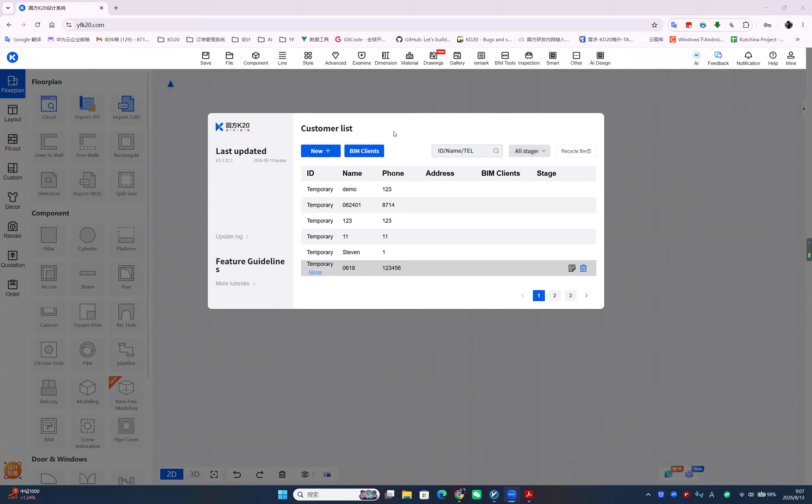Hello, quick high-level question. How do we edit the wall height if the project requires a higher ceiling, like a 4 meter ceiling? The wall is already preset, so how do you edit the preset wall height, the ceiling height?

Or the ceiling design height? Because when you place the wall, it automatically generates the wall, floor, and ceiling, correct? Okay, I know what you mean. First, the room height. This is the room, right? Let's click this one, and we can see here, this is the room height.

So here, this is the room parameter. The default is 2,800. So this is the room ceiling height. The ceiling height is going to be deducted from the room height. That's the reference, like negative 350, like yesterday, remember?

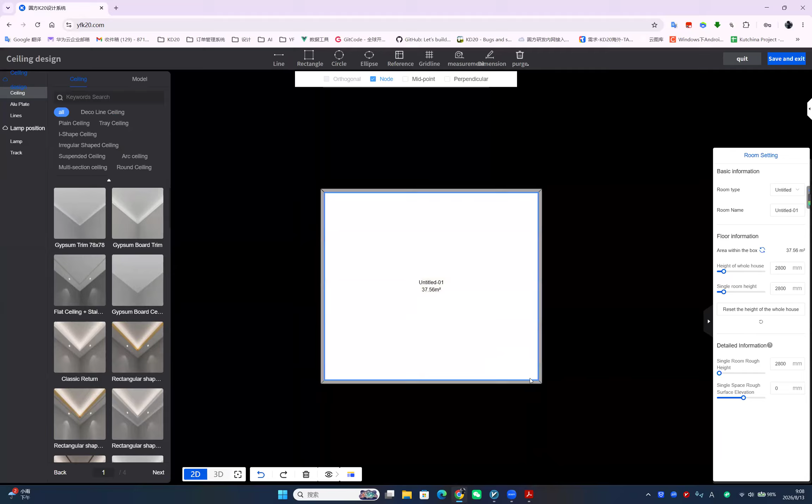Oh okay, the ceiling. I use this ceiling, like this ceiling. The ceiling height means this one, the sink. The sink here is referencing from the top, down to here. Basically the base room height, the base ceiling height, the one we established in the room, deduct the ceiling. That's the actual, so at least we can assess, correct?

Pardon, can you repeat again? Okay sorry, so I'm just assessing.

So the main ceiling is, let's say if you have a cove light, right? You have a ceiling, you have a double ceiling. The main ceiling that we're going to deduct from the ceiling model is the room ceiling, the one from the room parameter I'm asking earlier. Then if you're going to model the separate drop ceiling, that is referencing the main ceiling we discussed earlier. That's why it's a drop from negative, sinking 300, meaning it's going to sink from the original overall height of the room, correct? Correct, okay.

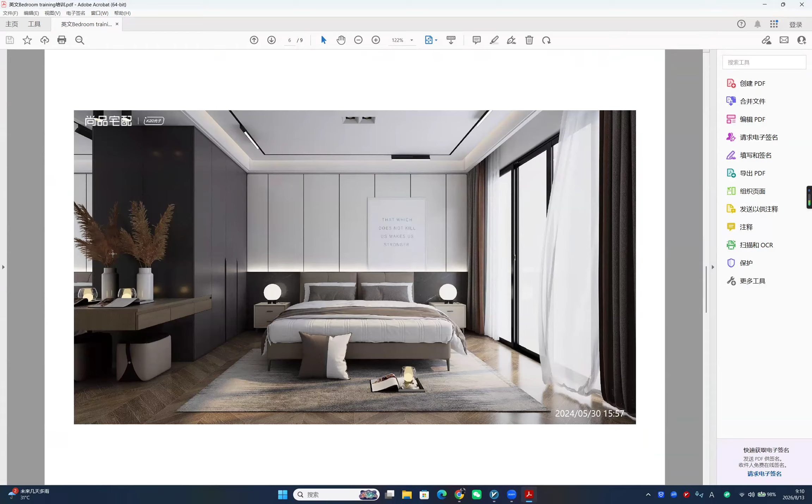Okay, like here, like this. Today we will design the bedroom, like this one. Okay, firstly, we can see this is the simple bedroom, firstly we draw the floor plan first.

Okay, and then we also click this one, the free walls. Free walls, and here we use the inner option. Firstly, we left click and draw and enter the value.

The value is 5,700. Okay, and then we left click or click enter. Next one is the same, enter 4,000. Okay, also click enter. Then here, next one is 4,500.

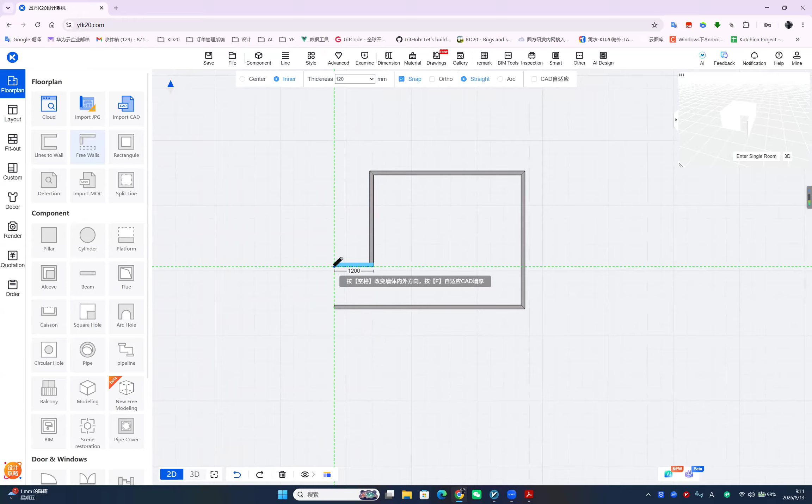Okay, next wall is this, 2,818, 2,818, and also enter, and move our mouse to here. We can see there are green lines here. We just left click and then draw the next wall and the backdrop. The floor plan is finished. Okay.

Okay, and then we change the room name. The room name here, we can see the default is untitled, so we need to change this room name. We left click this one, and then we change it to master bedroom. Okay, and the room height, we just mention it here, we change it to 3,000.

Okay, and then we create a door, a single door here, the room door. Right in here, we left click and then put a door here first. And then if we want to change the opening direction, we just left click this one, and we can see this icon, the turnover icon. Left click, and we can see the direction is changed.

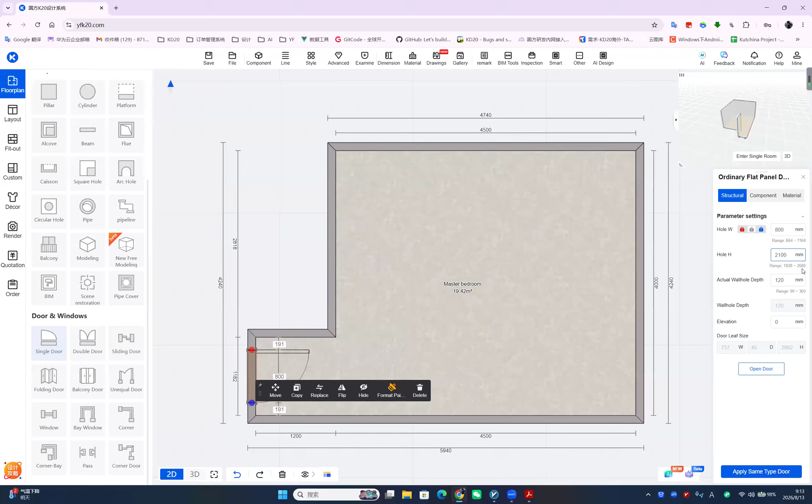So we can also change this, and this is a default value. We can use this value, or we can change it to 2,400.

Here on the right up corner we can see the effects, like this one. And then in here we can draw a balcony door. The balcony door in here, put it into the middle, and also change the width to 3,000. The height we also change to 2,400. Okay, and then we can see the effect here.

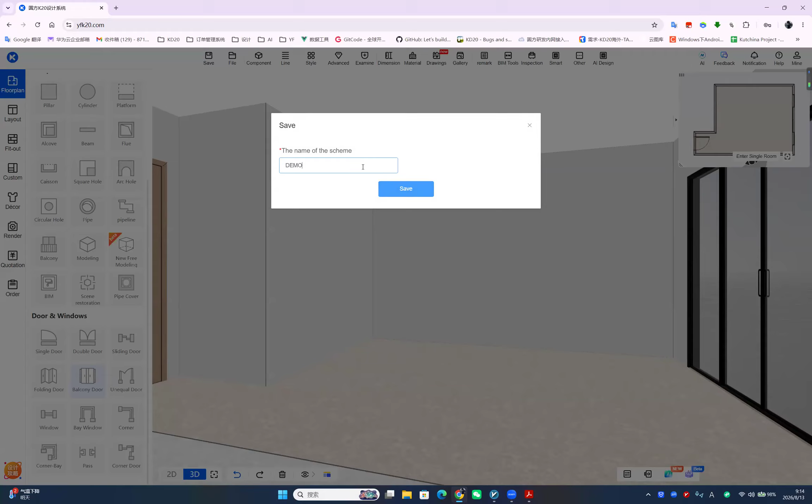And then we go into 3D, click this inside. Oh, we need to save the scheme first. Save the scheme first.

We create a ceiling. Left click the ceiling, and then go into the ceiling design. Firstly, we add the board in here first, this one. Also left click to this corner and to this corner. The first one in here is finished.

And also the sink, yes, the sink we change to 300. Okay, and then we can see like in here the wardrobe is on the left side.

So in here we can also use this board like here. Also use this one, and the wardrobe depth including the door should also be 600.

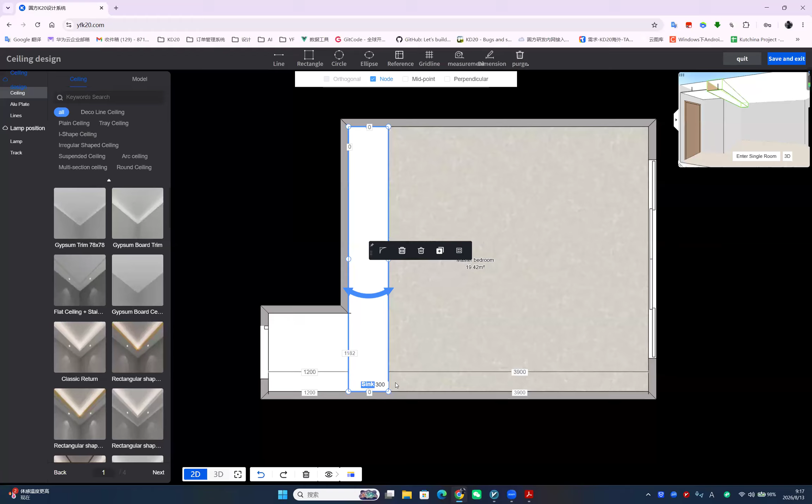In here we can see the ceiling in here is finished, it's created. Also, the sink changed to 300.

Next, in here we can use a ceiling model. In here you can see this is the different models. We can use any one of ceiling in here, wait a minute, like this one.

The code is A580, this one, A580. We can enter the code in here and click, and click enter. We can see we can only search this selection. Left click in here, also use the same method.

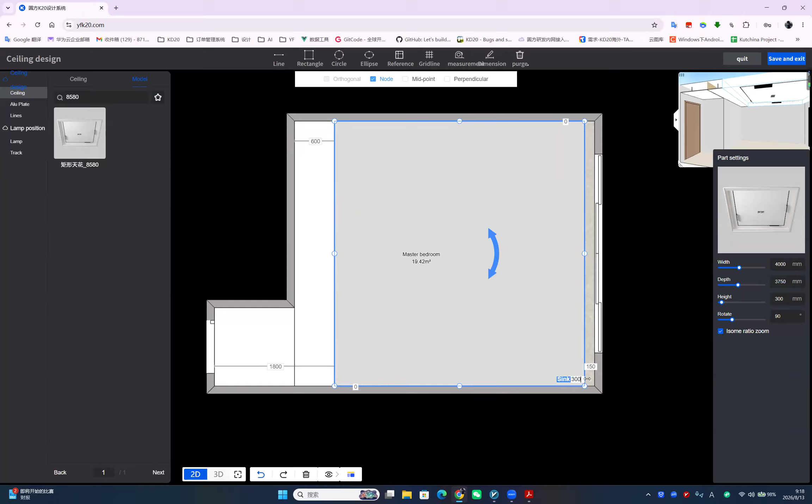And then we click save and exit. We can see this is the ceiling, the ceiling is finished. Next one is the floor.

The floor, yesterday we used the tiles, right? And today we need to use the wooden floor, and today we use another method to create the wooden floor. Like we can see, firstly we left click the floor first, and we can see the toolbars in here.

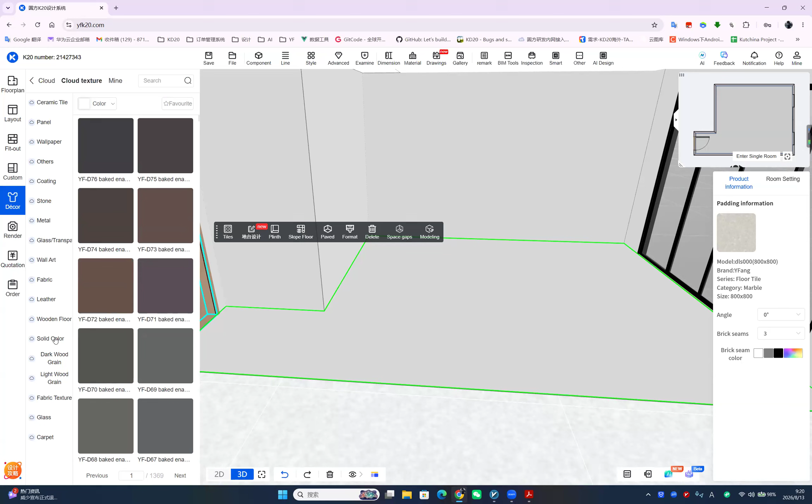In here we can see the texture catalog, and then we click this catalog, cloud texture. Cloud texture in here we can use it, and then in the standard catalog we can find like this one.

A0229, this code. Okay, firstly we left click, and then we apply to the floor, just left click to the floor in here. Yeah, this wooden floor is in here. And because we use this method, the render will be more realistic.

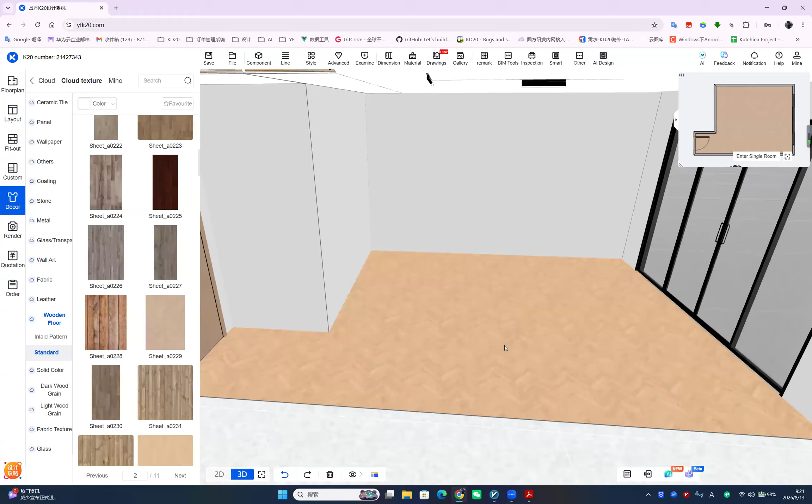Okay, you can save the things. And then we need to create a wardrobe. And next one is the wardrobe. We change the angle to here.

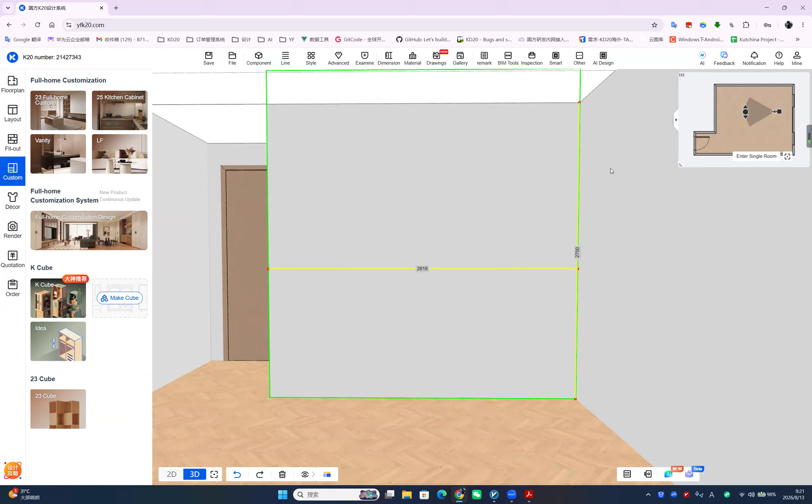Okay, change to here. Firstly, at the right, the filler we can edit in the last time. So we need to create a wardrobe first in here. The first wardrobe is this one, the right. Firstly we can enter the wardrobe size first.

Like the width, we use 450. And the depth means the wardrobe inner depth, so it does not include a door. So the depth should be 580. And the height, the height we can see the height from the floor to the ceiling, in here it should be 2,700, and we need to add a filler on the top.

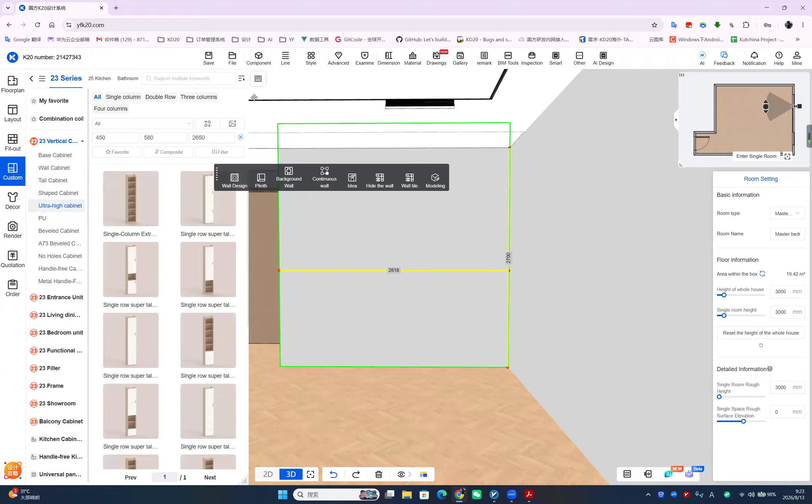The filler should be 50mm, so the height should be 2,650 here. Oh, we can see there is no data, it means this size cannot be used in this catalog, so we need to use this catalog, the ultra high cabinet. The ultra height means the height is more than 2,000 and 2,400, we need to use this catalog.

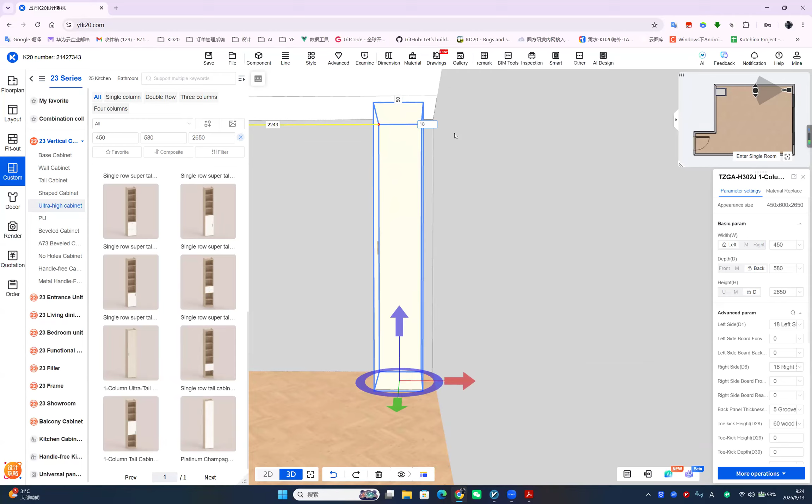Okay, we lay out first here. Move left, and then from the cabinet to this wall should be 18.

Okay, and then we open the door to see the inner. It means like this. There are many panels in here.

We can also delete it, but we can see, like, we click into this component mode, and then we select this one, and we can delete it, right? Like this one, we cannot delete because we can see the back panel. It means this panel is connected to this two back panel, so this one we cannot delete it.

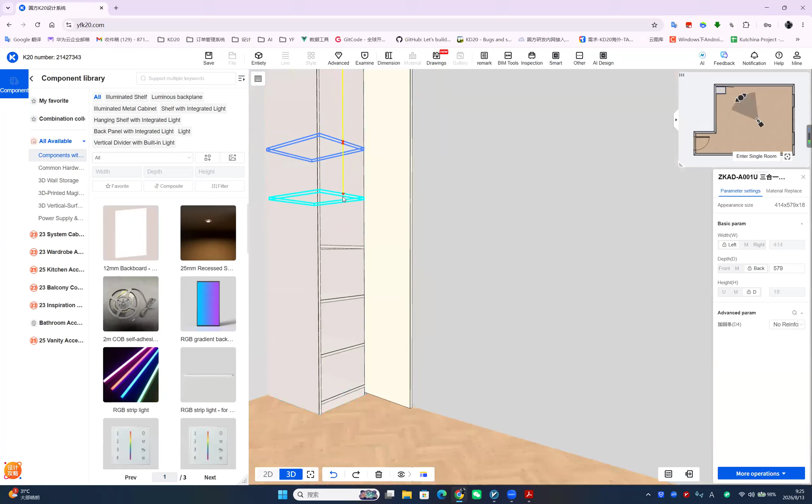But the next line, this panel can delete. This also cannot, means this is also the connected panel. Okay, this one also can delete.

Okay, and in here, if we want to change the panel height, we need to go back to the entity mode. The entity mode. Okay, the entity mode, and then we left click this cabinet.

We can see the right side in here. This is the toolbar. The toolbar in here, we can see there are the last two options. It means this panel height and this panel height, like this one.

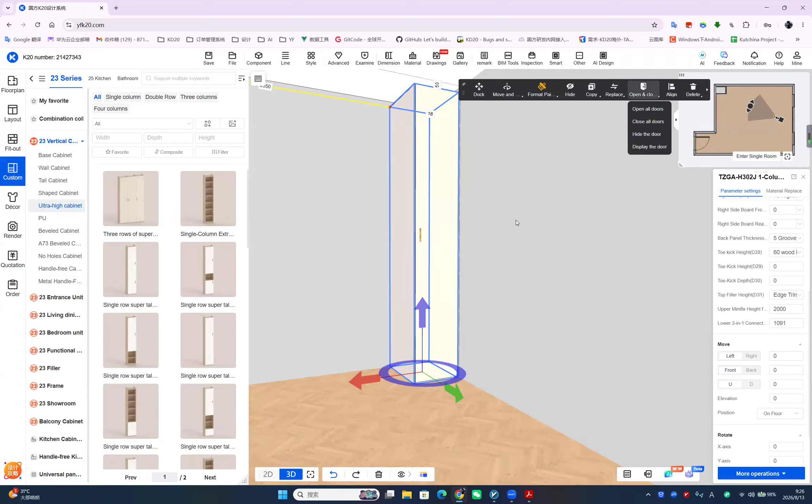Like we change to 2,000. Okay, oh here we can change it. Now we change it. And the next one is this one, like we change to 1100. Okay.

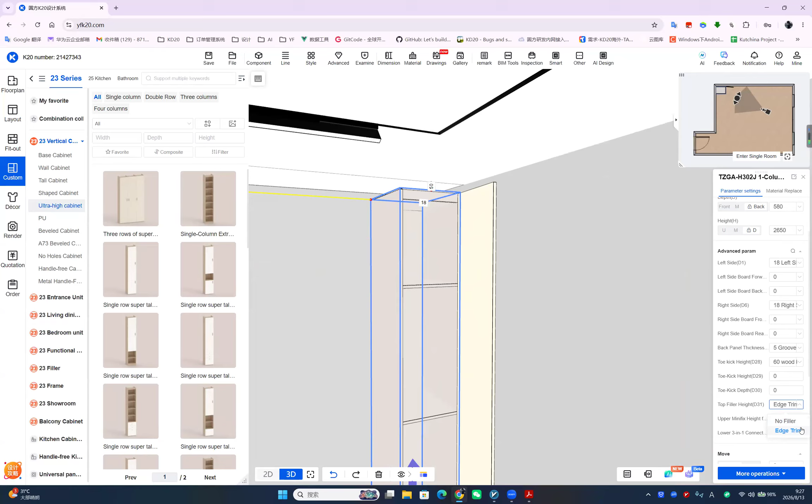Okay, and then we can see the top panel in here. We can see there are the edge in here because we use the filler, so this edge we can delete. How to delete? Also on the right side here, the top filler height - the default is including the edge. So we need to change to no edge, no filler in here, because we need to add a filler.

Okay, and then this is the first workshop. Next one, on his left, we can add the two doors workshop. Two doors workshop.

Okay, the width is 900 and the depth is also 580. Height also 2,650. Okay, we also use this one. So use this one.

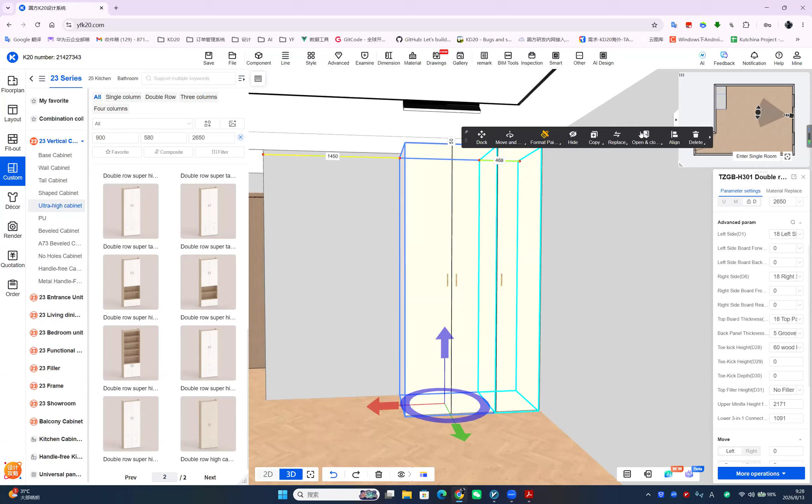Okay, the same method. Firstly, we change this top filler height to this option, the No Filler option. Okay, we open the doors to see the inner.

Then in here we can also delete the panel, like this one. Oh, we can delete this one, and also this one can delete it, because also these two panels we can see are the connected panel. Okay.

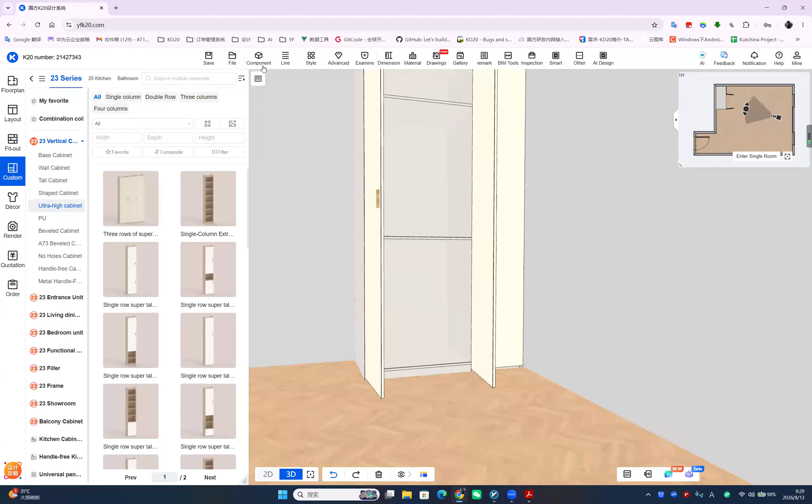Okay, we go back to the entity mode on the top toolbar here. Back to the entity mode, and then the panel height - this panel height also use the same method. On the right side, two bars in here, we change it to 1,100. Okay.

And then we also delete this one. Okay.

Okay, okay, and then we create another cabinet. Here, base cabinet.

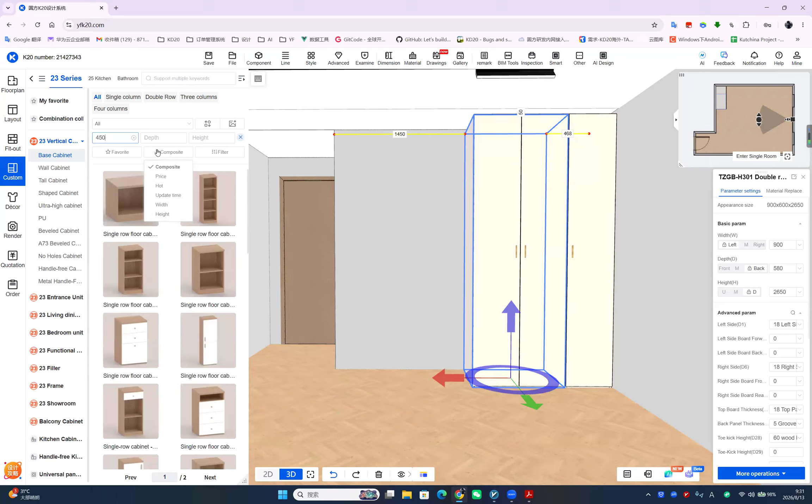Okay, we also enter the width first. The width is 450, 450, and then the depth also 580. Okay, the height - this is the low height cabinet, the base cabinet. Okay, and then the height should be 600.

Okay, it should be 600, and then we see the base cabinet in here first, the base cabinet, and then we use this one, the single row for this one. We use the left open.

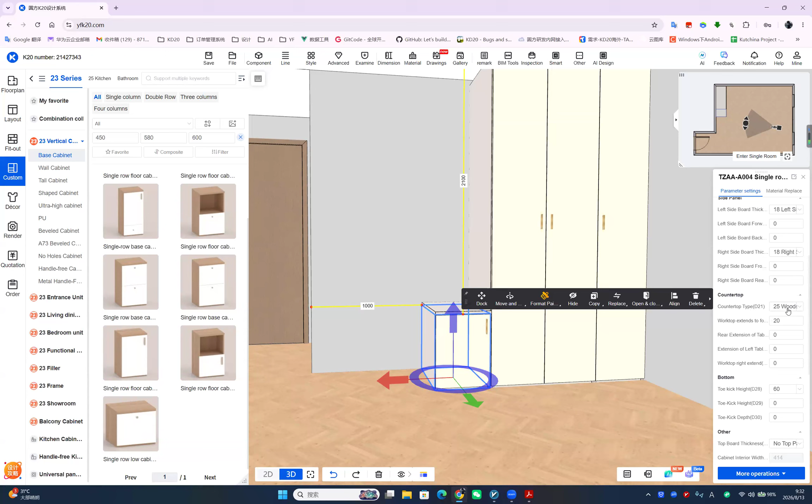Okay, and then in here the countertop type - because in here we can see there is the drawer on here, so the countertop we don't need it. Here we use the first option. Select the first option, no countertop.

Okay, use the default settings, and then we create the drawer here first.

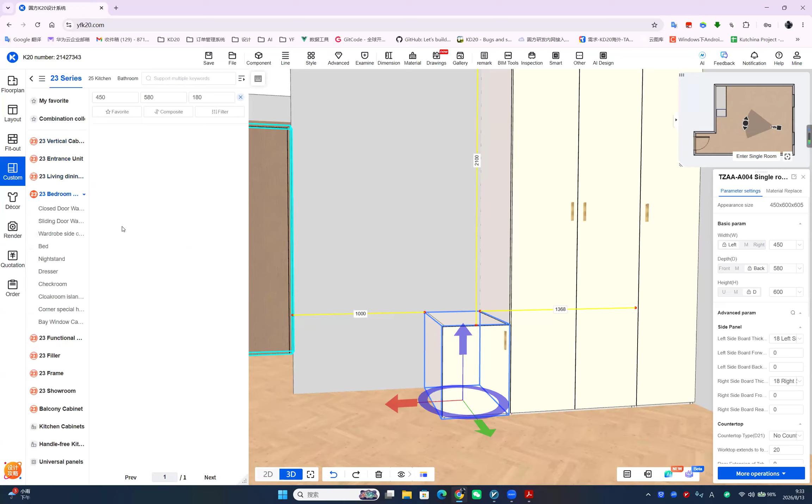Okay, we use this one. And then we move on to this cabinet.

Okay, and then here you can see there are two desks on the left.

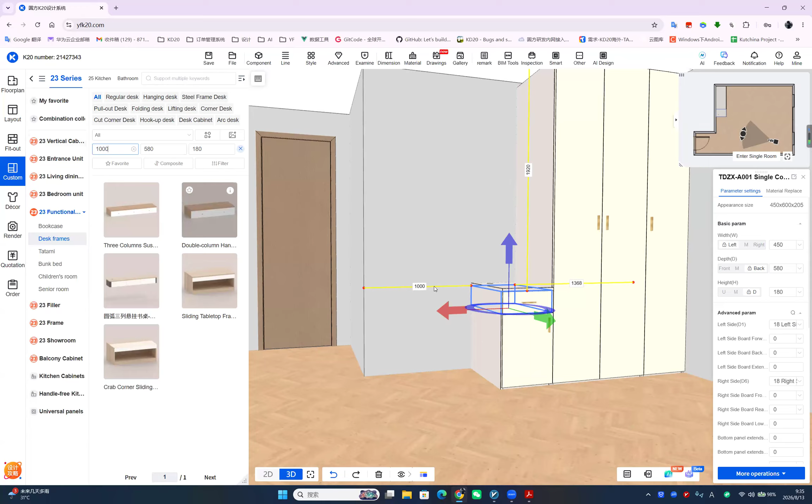So we create the next one. The width, we can see the width from this desk to this wall is 1,000, so we use 1,000 width. Also, layout first here, and then move the height, move it to here.

Okay, and then the next is this cabinet, meaning this cabinet. The width also 450, and then the height, we can see the height, we can use this dimension.

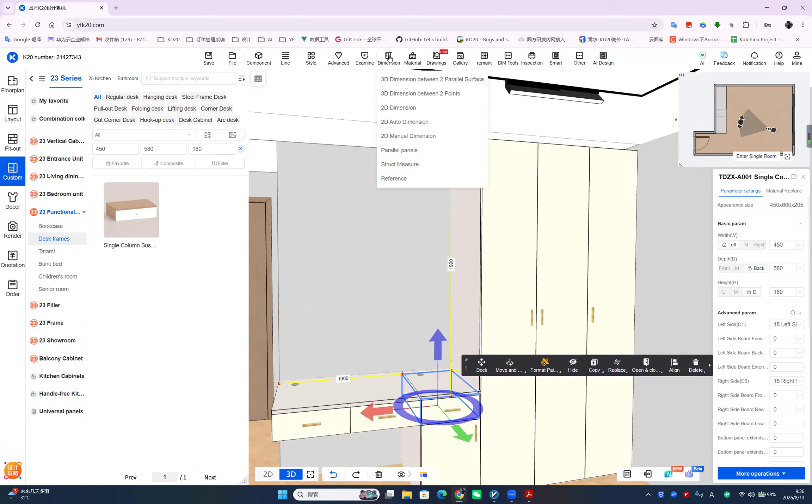The first one: firstly we left click this ceiling, and then next we put it into here. We can see the height is 1895. Since here we have a 50mm filler, the height should be 1845.

Okay, and then we go to this catalog. Use the wall cabinet, because this cavity is here, so we need to use the wall cabinet. Use this one, layout here first, and then we change the direction, change the location here.

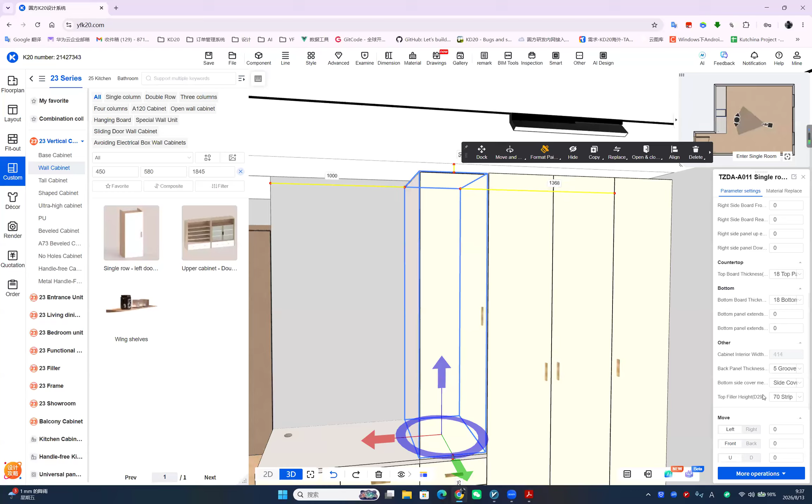Okay, and then on the last option here, we also change this top filler height to no filler.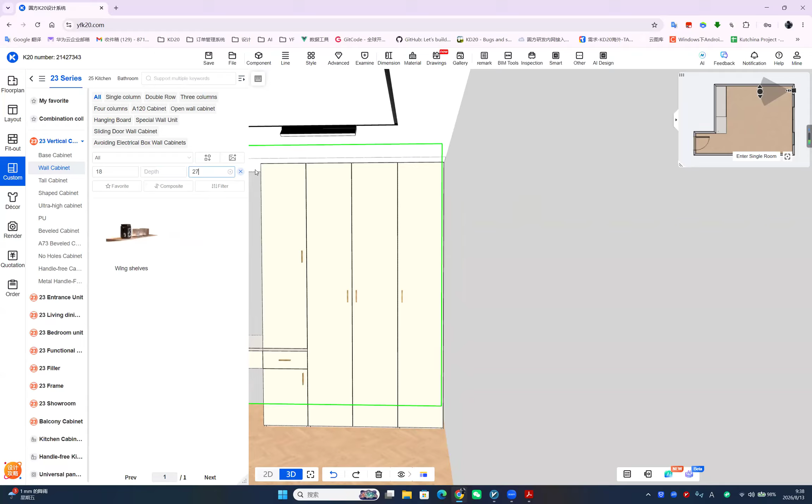Okay, and then we add the filler on the right side. The filler width is 18, the depth does not need to be entered. The height should be from the floor to the ceiling, which is 2,700.

Then found this catalog, the filler catalog. We use this one. Sorry, use this one. Okay, put it into here.

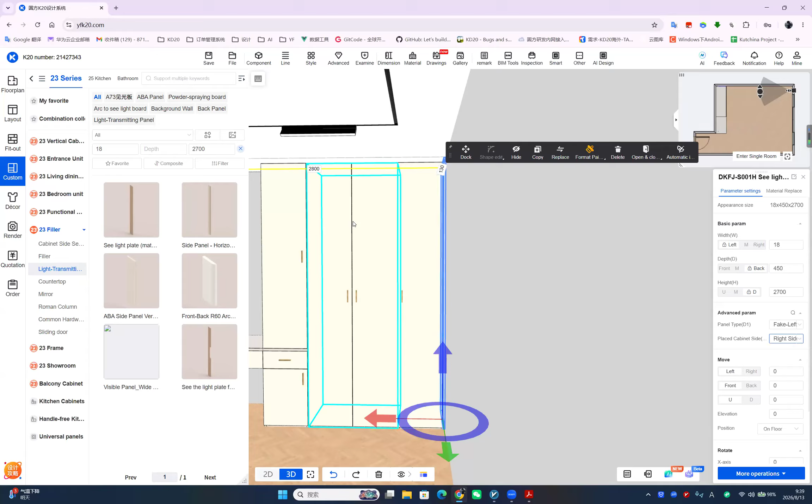Okay, and then we can see the right side. Here we can see the place cabinet side, and it is on the right side, so we need to change this option to the right side. Then the top filler we use this function and line, and the ceiling filler. Select these cabinets, select this cabinet, and the height is 50mm.

Okay, and then click generate. We can see it's finished. This filler is finished, and then we add a mirror here.

A mirror, okay, the width is 1,000, and then the height also uses this dimension function, and this is the height. We enter the height first, and then the width.

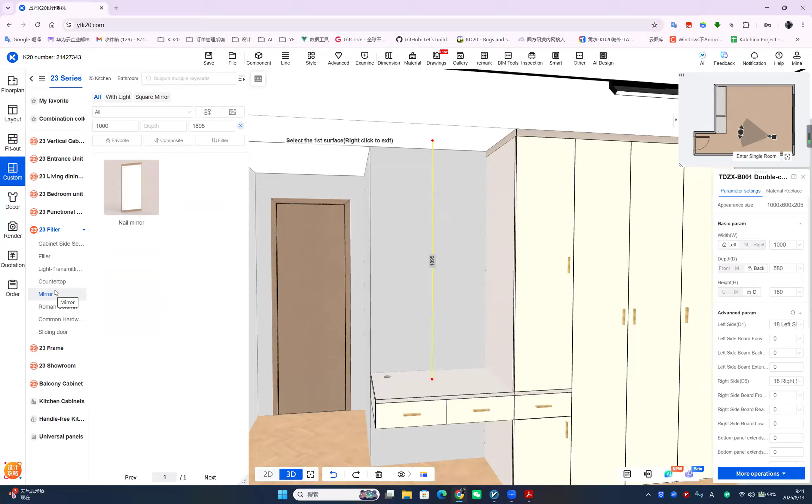Okay, and then we found a mirror in a minute. Here the filler here, we can see the mirror - this is the mirror. And then we use this one, okay, and then this one, and then the next, the Y side, this value we all change to 0.

Okay, and then the board design is finished.

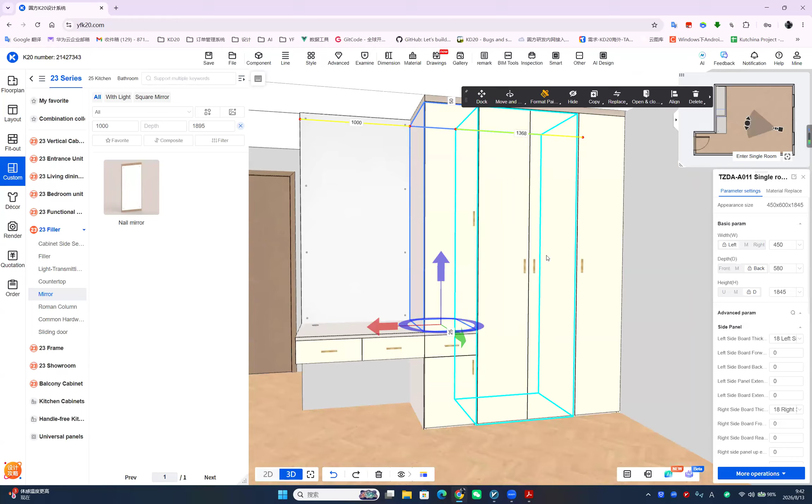Okay, and then we change the color. We change the carcass color firstly. We can select the first one.

Okay, here the material replace and the carcass material. Carcass material here, we see there are GDF, there are many colors. Today we use this one, GDFMR Sky Grey.

The Sky Grey. Okay, next one also use the same Sky Grey, and this one, and this one - except the drawers.

The drawers we can use another color to match this one. We use this mountain agent laminate, this one. Or if you like, you can use another color, it's okay.

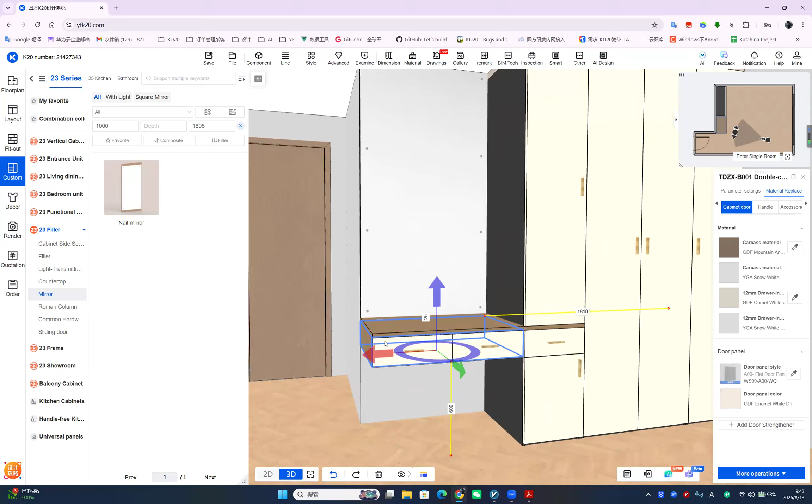Okay, and then the drawer door handle, the door style, the drawer style - we use this one. Left click this one, we can see in the catalog here.

We can see there are many different door styles here. Today we use this one, A119.

And then we can see the handle - the handle is on the top, and we need to use this door code, A119 JDT. Okay, we also use this color.

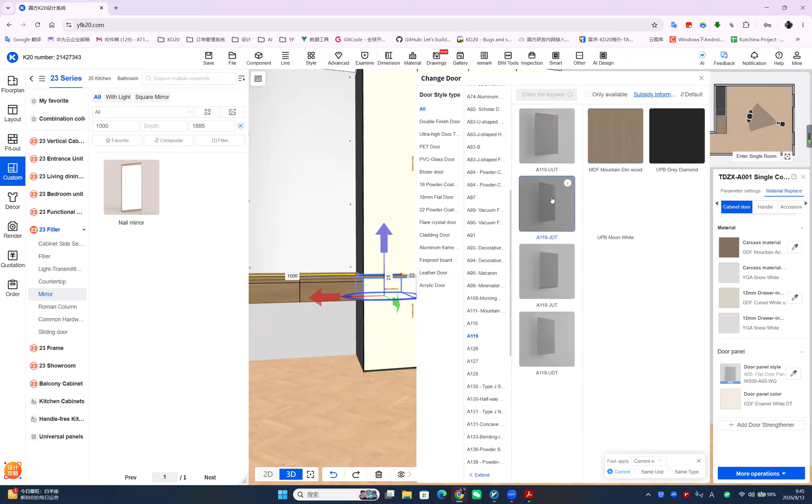Okay, and we can see the handle is here. And this one also uses the same A119 JDT, and then this color.

Okay, and then it changes. We also change the filler color, the top filler color. We use the sky gray, and this one also uses the sky gray.

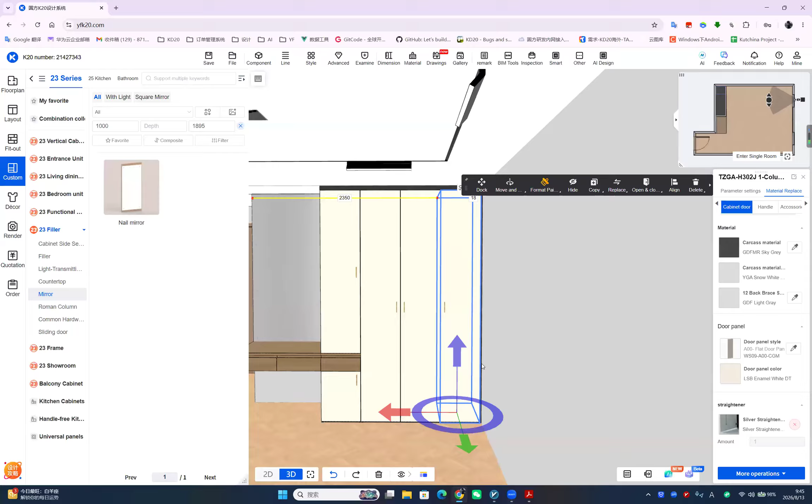Okay, and then we change the wardrobe door styles. Firstly we also change the right first. Change the right first. Okay, here also use the O.

This one we can use today we use A83 in here. A83 door style, or you use another door style, it's okay. Because they are right open, so the right open code is this one.

It's different. It's different from the left open. So firstly, we click this one and then select the modern gray. Use this color.

Then we use this color. Then the next one, we just mentioned, the left and the right door code is different. So we need to use the component to change these two door styles.

Firstly, we change the right open door first. Okay, use the component, and then use right here.

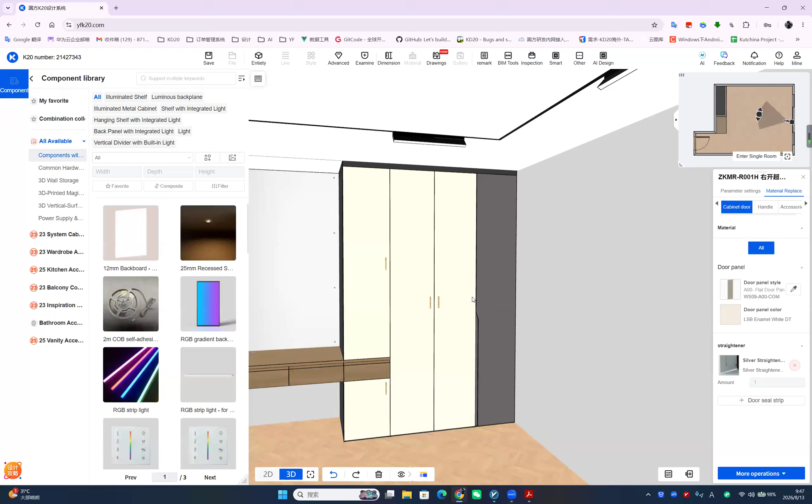In here we can use the classes. The glasses, there are the glasses catalogs. Aluminum frame glass door, can use this catalog.

It was A104, this one. And in here, we can see there are the A104 and R. R means the right opened. So we also use this color.

And the glasses is in here, the door inner. We can use this gray glasses. Here we can use this gray glasses.

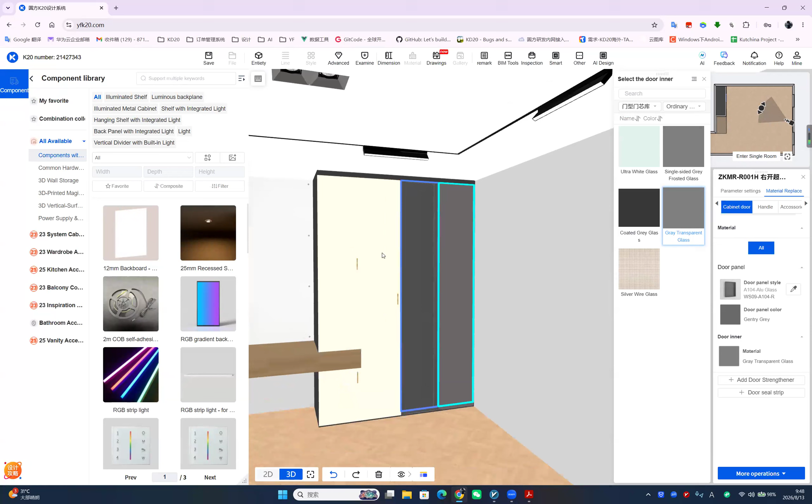And then the left open also use the same code, A104, A104 L. L means the left opened. Okay, the glasses also use the gray glasses.

This one and next one we left click this. Okay, this uses the A83, and we can see the handle because...

The handle we need on the downside, so we need to use this code. We use the modern gray, then A83.

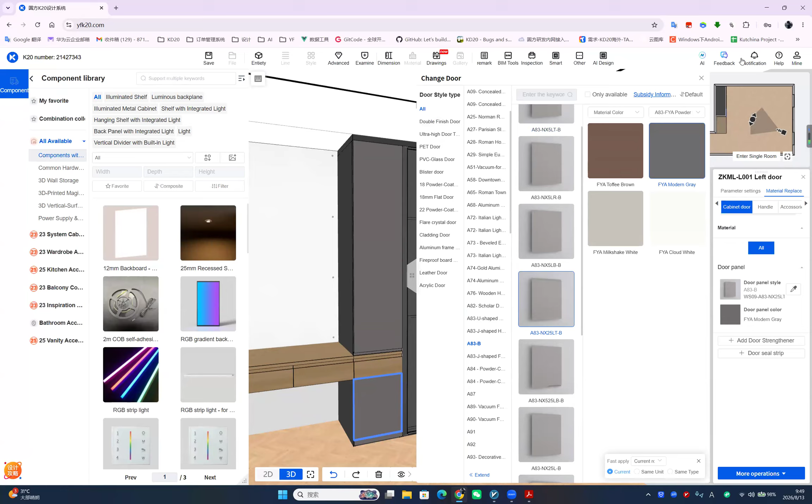This handle should be on the top side. On the top, we can find this one. Okay, and this color change is finished.

Okay, we back to the entity. Okay, save the things.

And then in this store, in this cabinet we can add the clotheslines on here.

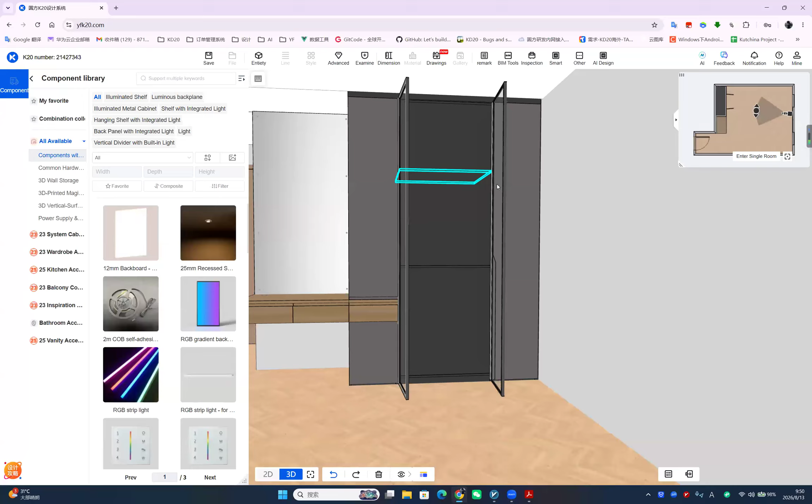We use the component, the hanger. Sorry, use the component, and then we can find the wardrobe catalog and the wardrobe. And then we can see there are the clothesline with light, and this is not with the light.

We can use this one with the light, and then into here, and it will add automatically. And the size will calculate automatically.

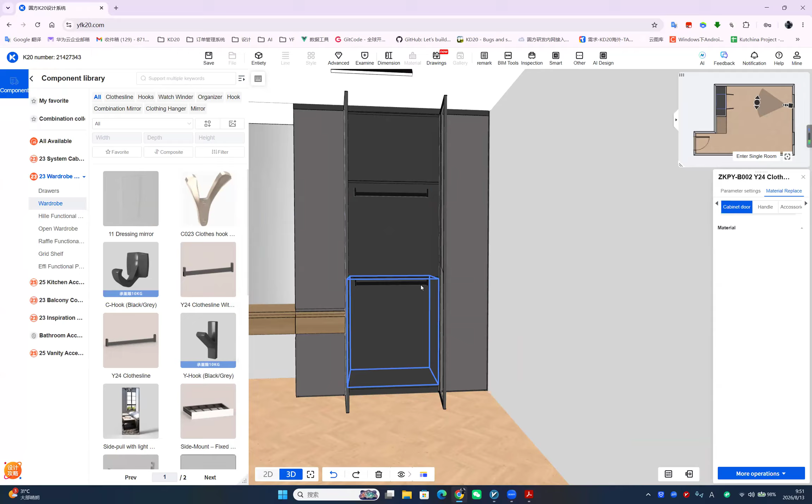Okay, and then we close the doors. Okay, and then go to the wall panel.

Is we change to this angle first. Change to this angle, and then we left click the wall. In here, we can see the background wall. Okay, use the first option.

Every wall panel that uses this one. Okay, and then we found wall panel first. This one.

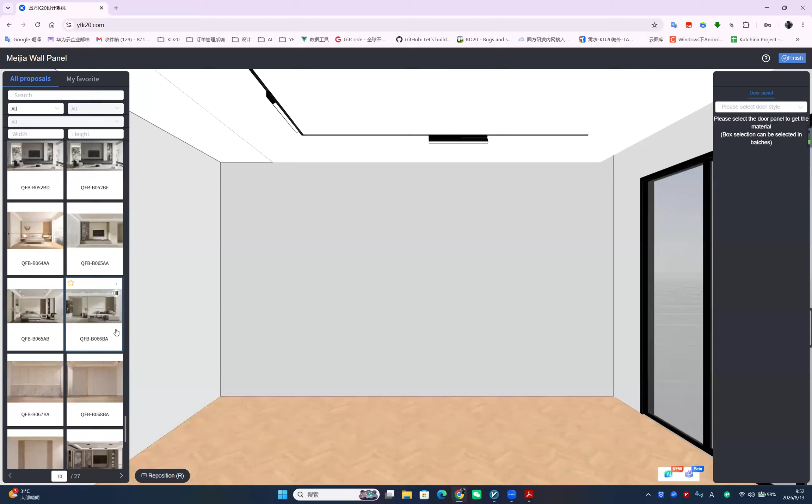Oh, we can use this one. QFB B067BA. We use this one. QFB B067. Okay, we put the layout in here first, and then we click finish.

In here we change the size right here. Okay.

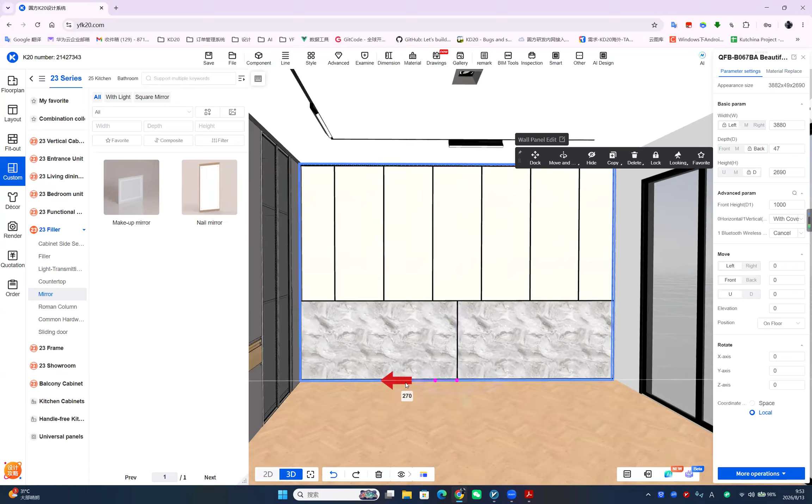Okay, and then in here we move this wall panel first. Move to here. Okay, and then we change the size.

And in here, we can find the light strip. Oh, in here, the light strips. You can use the warm color, the warm light, like this one.

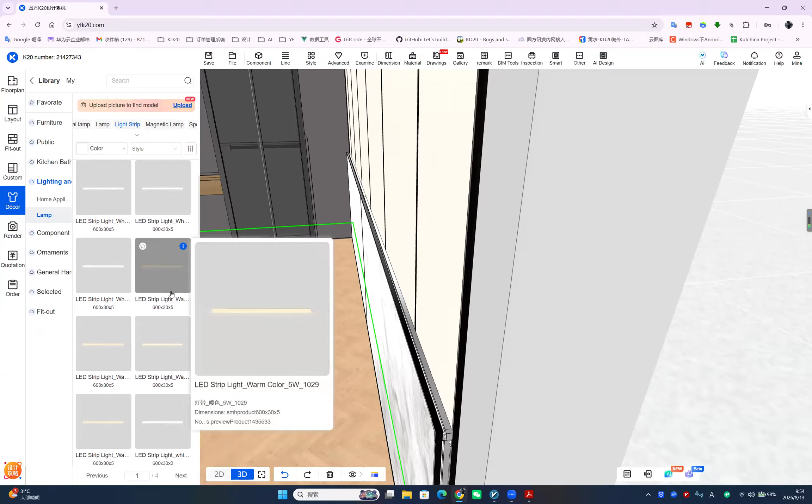Okay, and then firstly, we put in here. Okay, and then we change the width to same as the wall panel, like five, five of 3,750.

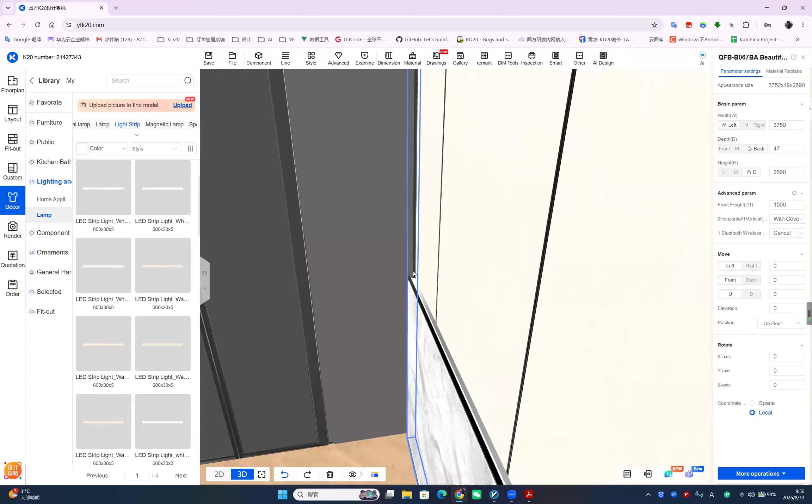Okay, it's in here. Okay, and then we change the wall panel color.

The wall panel color. In here, we left click this one and we can see there the door panel. The door panel option means these two colors, and we can see there are two options. And we can change one first.

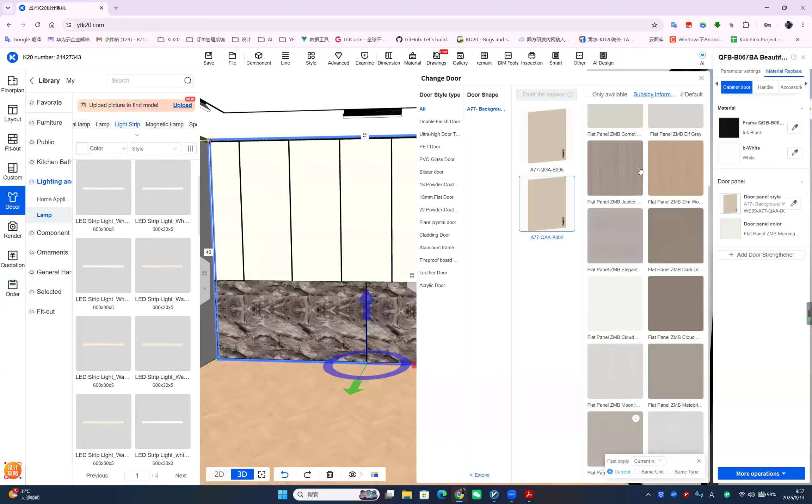Okay, like this one, the first one, and we change this one, this color. Okay, the next second one means this option. Okay, this one, we can use another color. Okay, use this color.

Okay, we use this color. And then we add the bed in here. The bed deck. Add a bed.

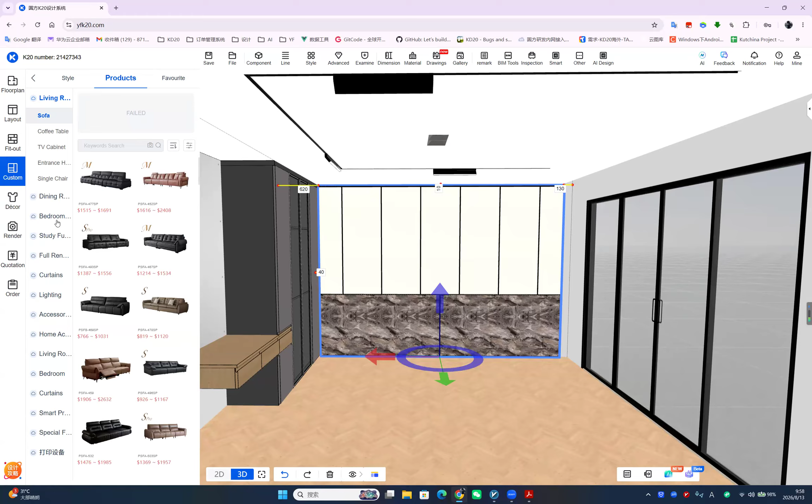And in here, the custom, use the loose furniture. Loose furniture, LF means the loose furniture. And then the products, and within here, the bed.

And like this one, we can use the first one. Okay, and apply. Sorry, we need to back to 2D first because in here we can edit more easily. Apply it, then we move to here. Back to 3D, and we can see there are only the frame.

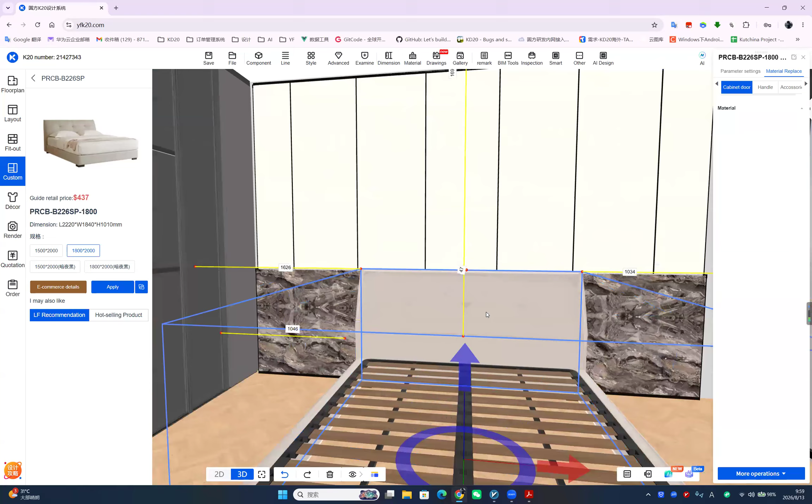And then we need to add the bedding, the pillow on the bed. We also use the decor and then the cloud models and the ornaments. Ornaments in here, they are the bedding. Can use like this one, the first one. Okay, firstly we add in here first.

Then we move the location. Okay, move to here, and then we can also change the width. Width change to 2,400. Okay, like this, it's okay.

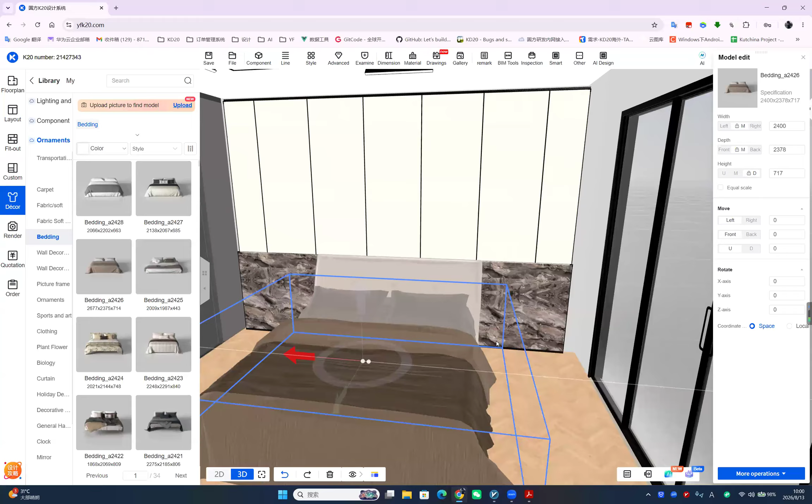Okay, and then we add the nightstand. You can add a nightstand here. Also use a loose furniture in the products, and beside the bedside table in here. We use this one. Here we use this option and apply it at here, and this one at here. Here.

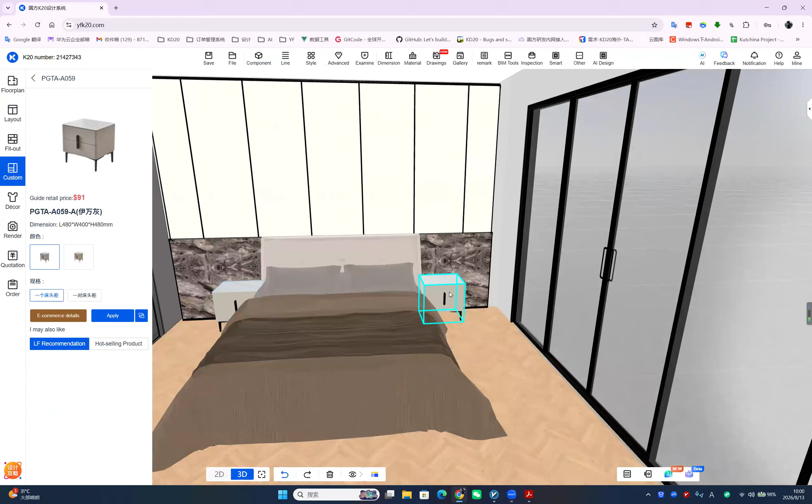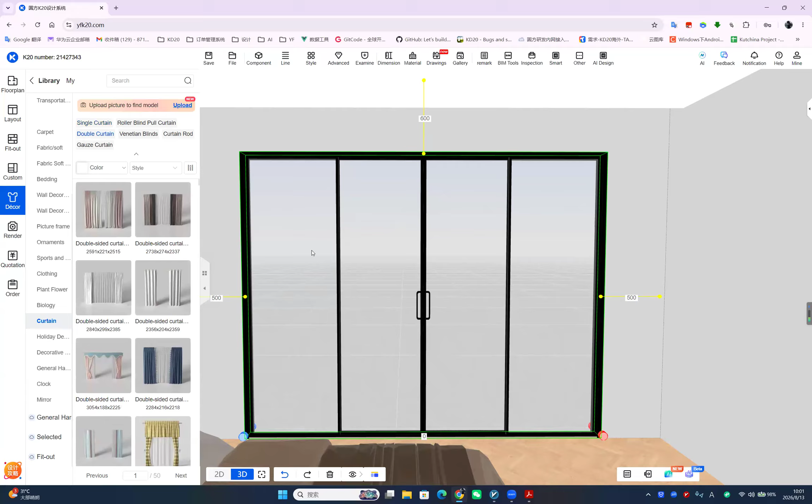Finally, the next one, we add the curtains in here. Okay, we need to change to this angle first. Choose this angle, and then we use the decor, and the cloud model, and the ornaments, the curtains ornament, and this. The curtains, and the double curtains, it means left side and right side.

Okay, and then we found this one, these curtains. Okay, we put into here first.

Okay, and then we change the width. The width we need to change to same as this wall. This wall is 4,000, right? So we need to change this curtain's width to 4,000.

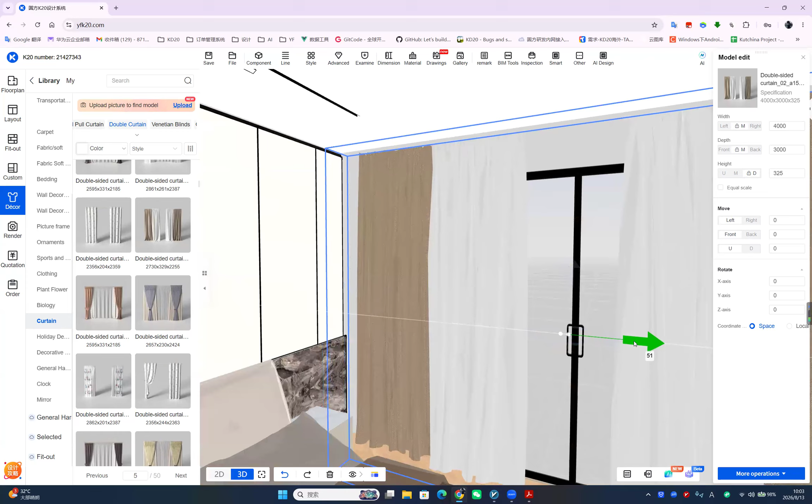Okay, and we move. And then the height, because the model, so the height should need to change in here. The second option need to change to here also. 3,000. Okay.

Oh, we can also add more. Okay, and then, okay, and then like this color, if we don't like it, this is a brown color, right? If you want to change this color, how to change?

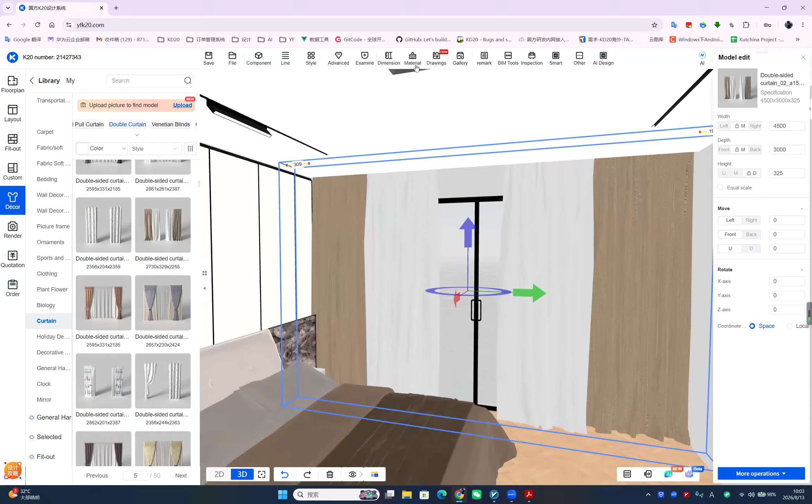We can use this function, material. Firstly, we left click this material, and then we left click this brown color, and then in here we left click this map. Then in here we can change the color. Okay, use the fabric, and then the solid color. The solid color, we can use gray. This one, the gray color.

Okay, and then we add the decor on this table. Okay, back to Decor, and then the elements. Also use this catalog.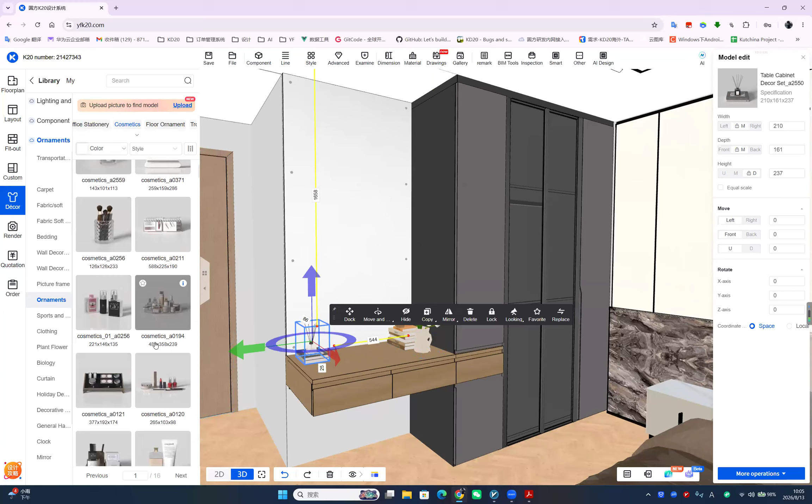Okay, and there are many models in here. We can use other models, it's okay, just for the rendering. And in here, in this model, cannot be sold, just for the rendering.

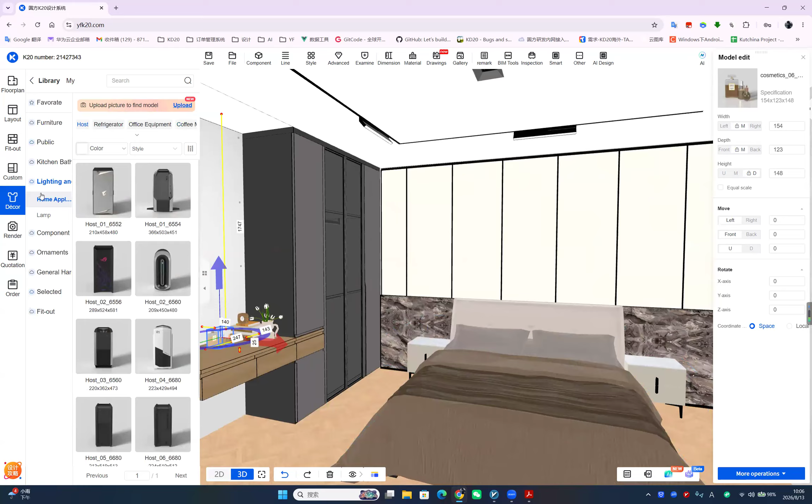Okay, and change the direction. Then we add a lamp, and the lighting, a lamp. We can find the desk lamp. The desk lamp.

Like this one. Here also use this. If you want to change the direction, we left click this one, and then the mirror. We can use this option, left and right mirror. Okay, so the direction is changed here.

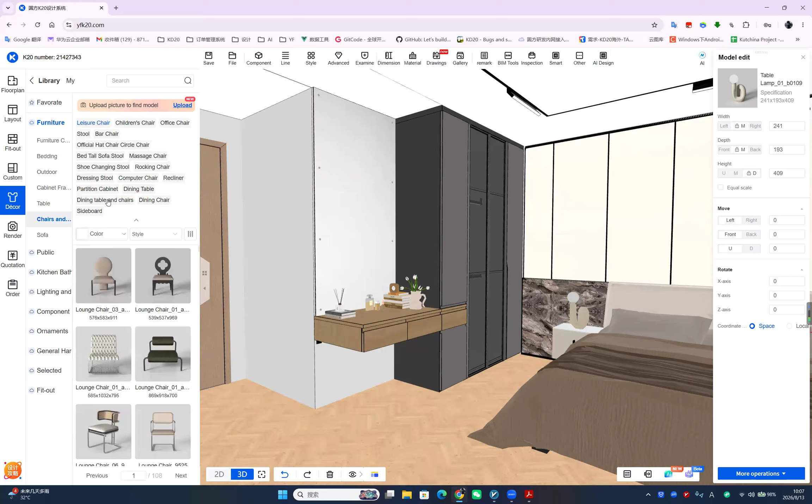Okay, also add the stool furniture, and then the chairs, the stool, the dressing stool, and like this one. Okay, and then we save. And we save the scenes.

Okay, after add the direction, the decoration, then we can try to render. We use this one, the professional mode. Okay, firstly we change our angle to adjust our angle.

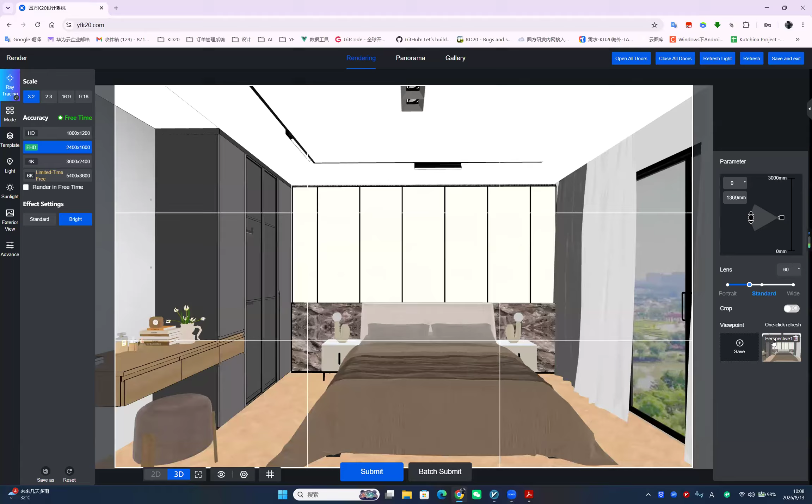This one, the first one is this angle. Okay, after we adjust, and then we save the viewpoint, save the angle. And then this is the first angle. The first angle, and then the next angle, we can use this angle, this angle, then save it.

The next one, we use this ray tracing mode because this mode is faster, the render speed is faster. We can use the 4K accuracy, and then the template we use the normal. And the light, we use the first one, the default is okay. And the sunlight, we can see, we can turn on the preview. We can see the sunlight is brightening from, it's brightening. Okay, if we want to change the sunlight, we can change back to 2D.

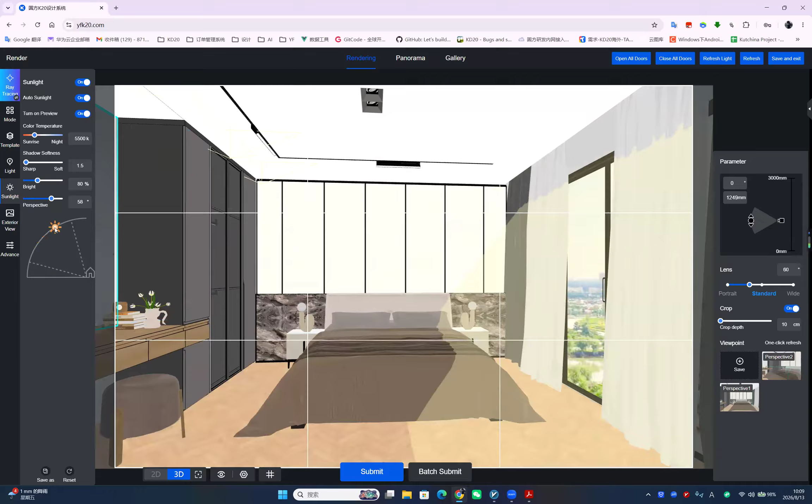Sorry, the sunlight - turn on the preview, we can adjust this option. We can drag the sun in here, this one. Okay, the sunrise, the color temperature - we can change the color temperature.

The exterior view means these pictures, and we can use other pictures like this one, or the white one, or this one. Default is this one, and then at once we can turn on real-time dimming, real-time material, and this one.

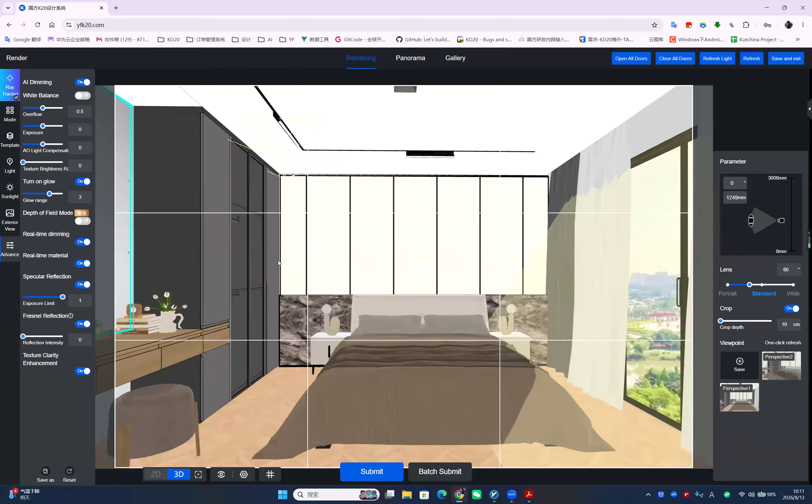We can also open it, and then after we finish setting, we can submit the rendering. Batch submit, and select these two angles, then click confirm, waiting to submit.

Okay, then we go back to the gallery. We can see this is the rendering we just submitted. We can go to the panorama, here at the panorama.

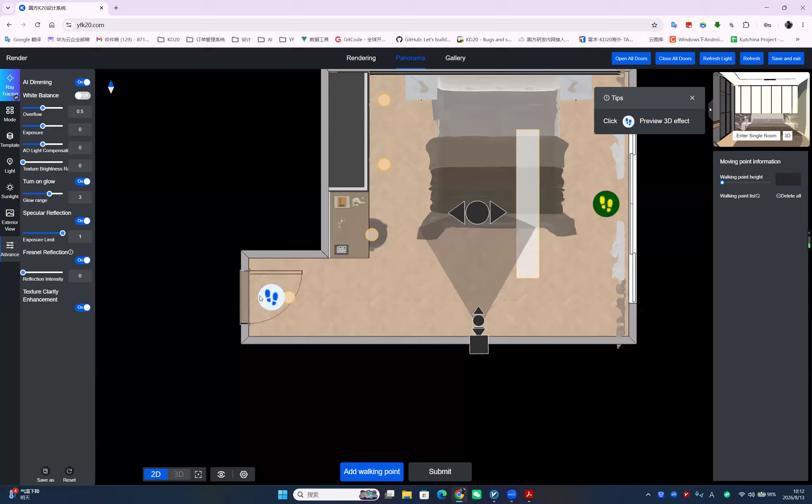Left click, and then we go back to 2D. We can select and change this angle. The first angle is in here, and we can change it to be more inside, and this angle we change to the middle. Then also use the ray tracing mode.

We can use 6K or 8K, that's okay. The template and the light, the sunlight, the exterior view and the advanced settings. After we set it, we can submit.

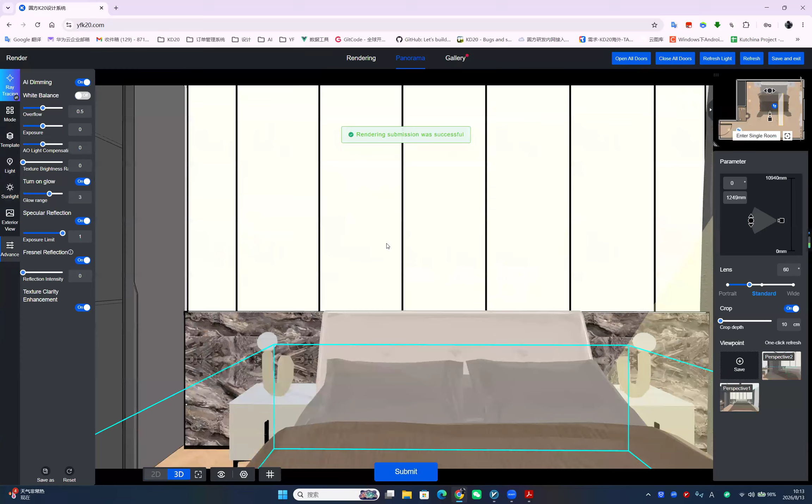Sorry, we need to change our angle inside the bedroom. Okay, we can also use the 2D view to submit the angle.

After we submit, we can see the panorama is rendering here. We need to render the pictures. Okay, maybe - okay, it's finished. We can see this is the rendering.

If you want to beautify the rendering, you can use this one, the AI beautified option. We can enter our requirements - right now this one is the daylight mode. We can tell it to change to night mode.

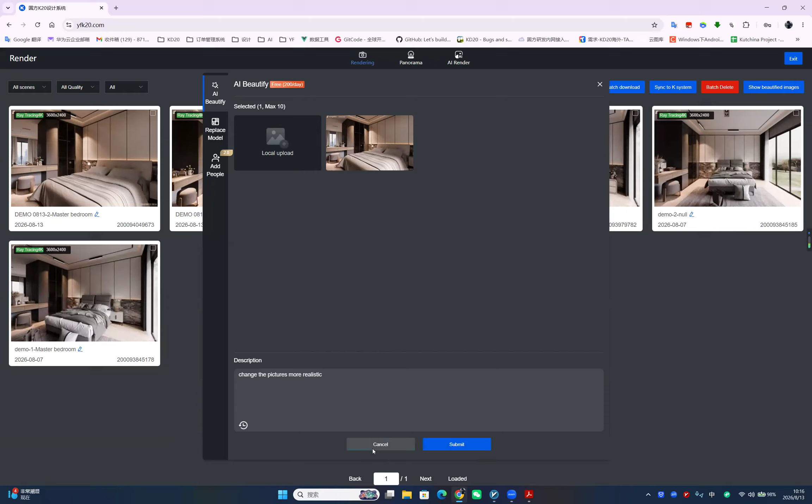This is also where we can enter another requirement - change the picture to be more realistic. We can see the AI render like this one, which is what we just submitted.

We can see it has changed to night mode, and the lighting is warmer here. Okay, the next one is generating.

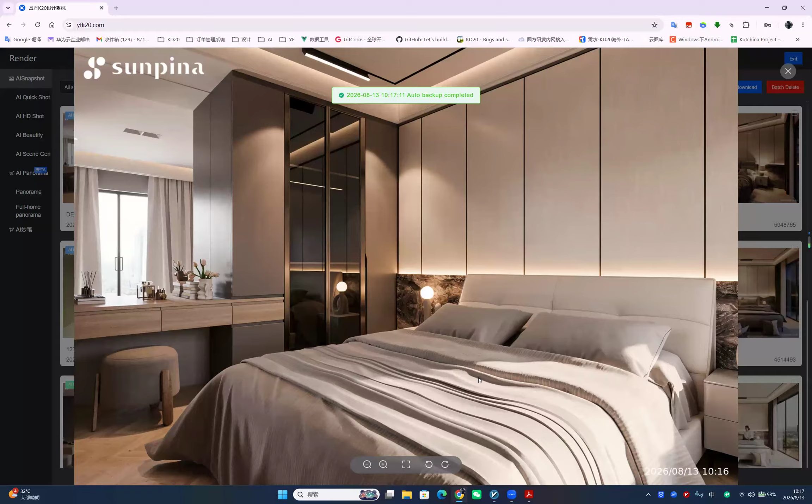Okay, refresh and see - this is after the AI render. We can compare this one - okay, it seems the picture is clearly more clear.

And then finally we can create a quotation. The quotation is in here, and it automatically adds the quotation. The currency in here - sorry, we will save this. The currency now, we have dollar, euro, RMB and TWD here.

Now the default we use the English version. The default currency is USD, dollar. Now this is the quotation, and then the CAD drawing we can use in here.

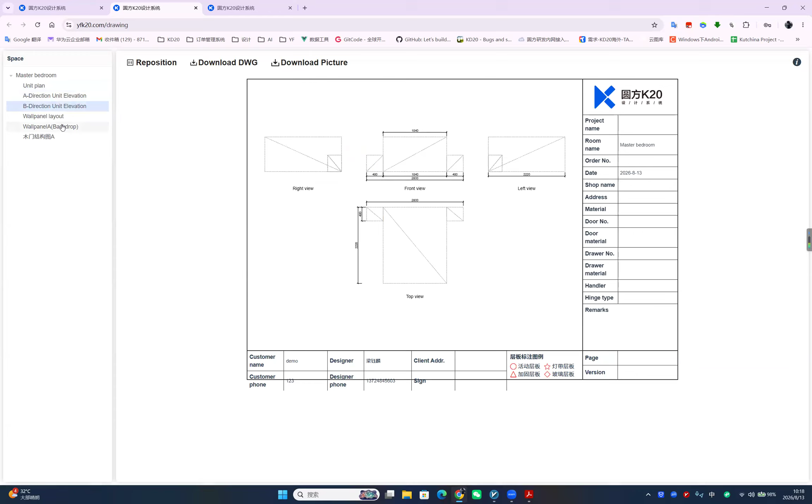And then the panorama, the panorama in here, you can check it. Okay, we can see this is the panorama. In here we can copy this link - this link we can see their ID. Their ID is only for this panorama, only one ID. So we can copy this ID to our customer to see the effects.

Okay, and then do you have any questions?